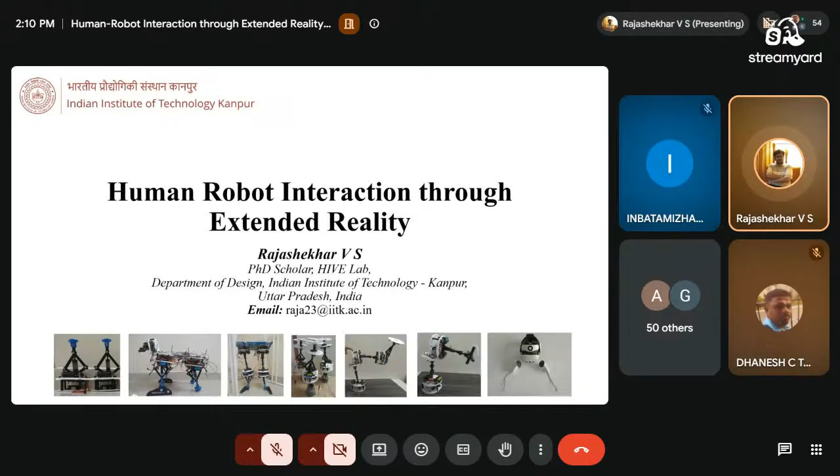This is V.S. Rajashekhar, a PhD scholar at the HIVE Lab of Department of Design, Indian Institute of Technology, Kanpur. Today, we are going to look into a topic called human-robot interaction through extended reality. I think many of you would have come across the term human-robot interaction, but extended reality may be a new terminology for you, which we will be dealing with in detail in today's session.

A short introduction about me. I did my schooling at Balalok Matriculation Higher Secondary School in Chennai, bachelor's from Adhiparasakthi Engineering College, affiliated to Anna University, master's from SASTRA University, Thanjavur, and I'm pursuing my doctoral degree at Indian Institute of Technology, that is IIT Kanpur. I have worked at Tata Consultancy Services, IIIT Hyderabad Robotic Research Center, TAL Manufacturing Solutions Limited, and Indian Institute of Science, Bangalore.

My area of interest is centered at snake robots, where I focus on bio-inspired gaits, computer-aided multi-body dynamic analysis, modular robotics, extended reality, locomotion control, mechanism design, robot kinematics, and human-robot interaction. My current focus during the PhD is in the area of disaster management, where I create awareness, evacuation, and rescue through extended reality by conducting user surveys.

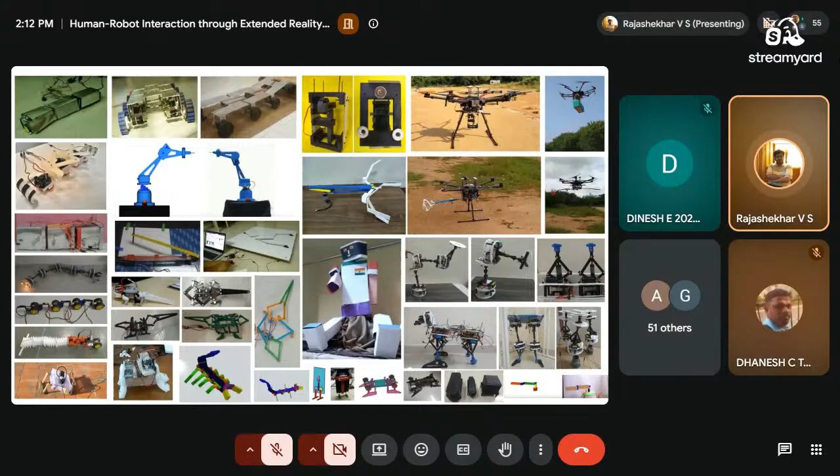These are a few of the robots that I have built in the past 15 years. This ranges from snake robots to aerial robots and manipulators. Now let's dive into today's session.

Today we'll be seeing the elements of human-robot interaction, which is shortly called HRI, through extended reality, which is shortly called XR, the elements of XR, that is elements of extended reality, their applications, a few topics in mathematics, and a case study about how to control a robot through extended reality.

Now we'll look into the elements of human-robot interaction through extended reality. We'll be dealing with individual elements, that is humans, robots, interaction, and extended reality. We will try to understand who a human is. Humans, in general, differ based on their gender, their special capabilities, and their age group. They range from infants to old age. In between them, there are teenagers and young adults.

For example, a smartphone is a technology which was successful because it was able to understand the needs of people of all age groups, and it is useful for all people. In a similar way, the technology which we design using human-robot interaction should be useful for people of all age groups. This should be in our mind when we design robots for humans. Robots.

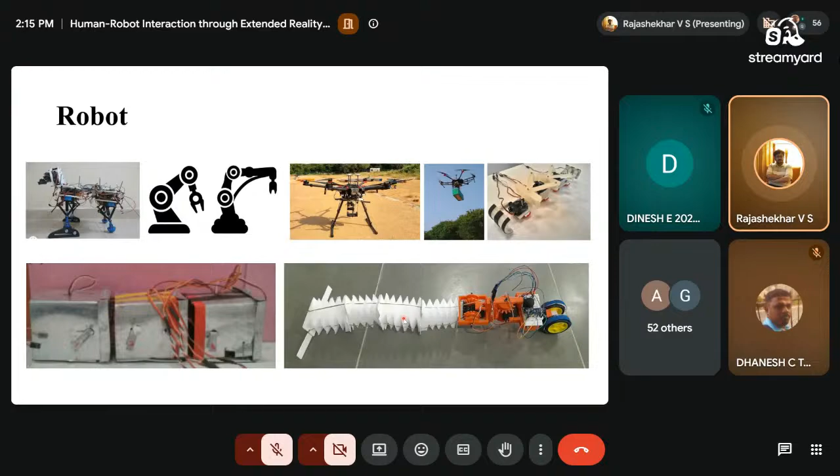So these robots can be controlled using extended reality. In interaction, the humans and the robots have to interact. This interaction can be physical, that is by directly humans touching the robot, or through gestures by asking it to stop or start using our fingers and hands, or it can be through voice and gaze controllers by which you can control the robot.

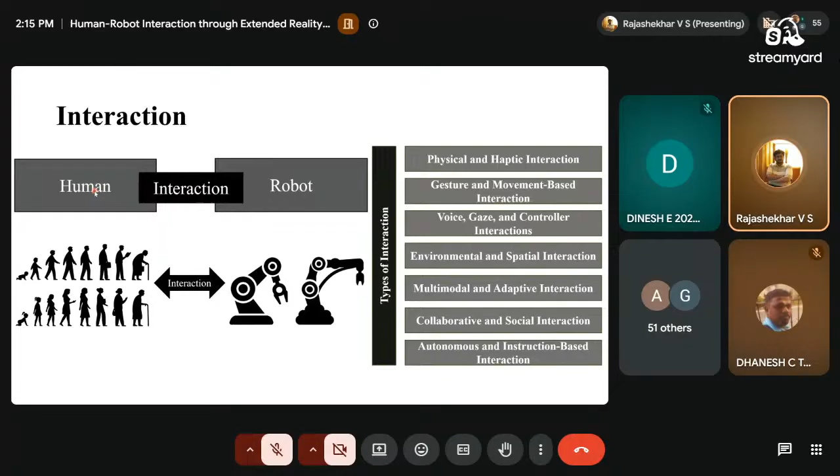It can be through environmental and spatial interaction. It can be through multimodal - multimodal here means it can be a combination of physical, gesture, and voice. And it can be through collaborative means by using several sensors, or it can be autonomous or instruction-based control. So this is how the interaction happens between humans and the robot in reality.

So in between them, there are a lot of realities called as phenomenal reality, augmented reality, diminished reality, mixed reality, annexing reality, augmented virtuality, and virtual reality. We will be dealing with them in detail in the upcoming slides. So if we are able to control the robot using one of these 7 types of realities, then it is called as extended reality - you're controlling the robot through extended reality.

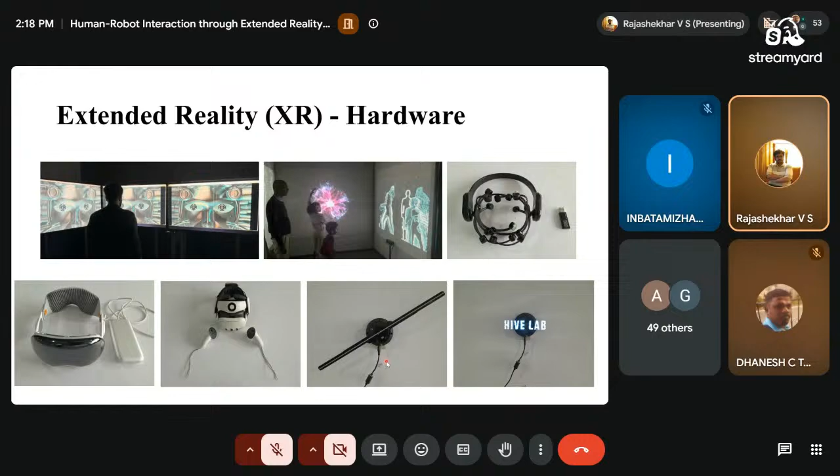Coming to the software, this is called Unity, which is mostly used for creating the 3D environment, and also Unreal Engine, which are used in most of the cases to create environments which can be virtual in nature.

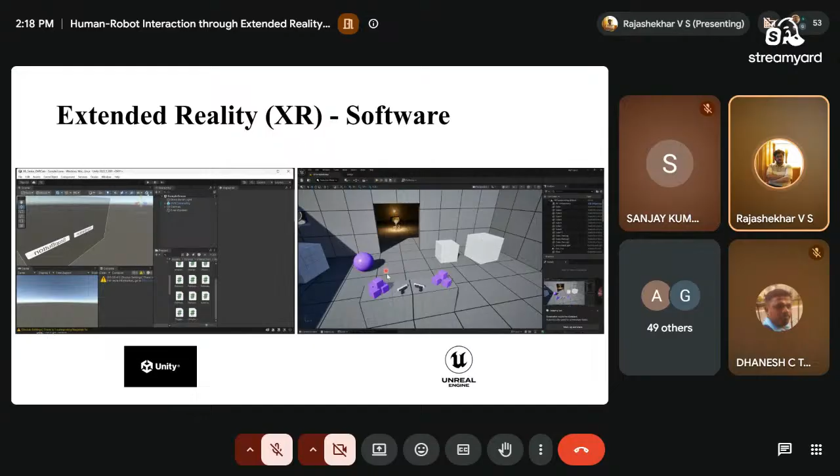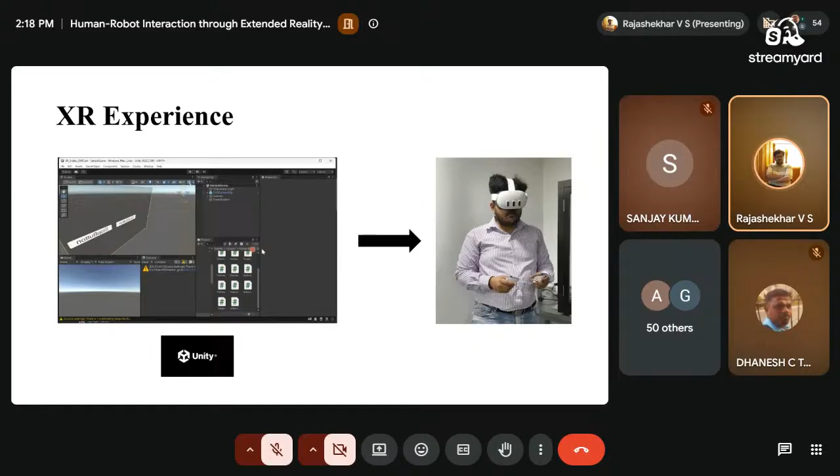So the XR experience, that is the extended reality experience, is given by focusing on a particular software, creating the environment, and projecting this environment by clicking the play button over here so that it is connected to the headset which I am wearing, and I can control the environment using the joystick.

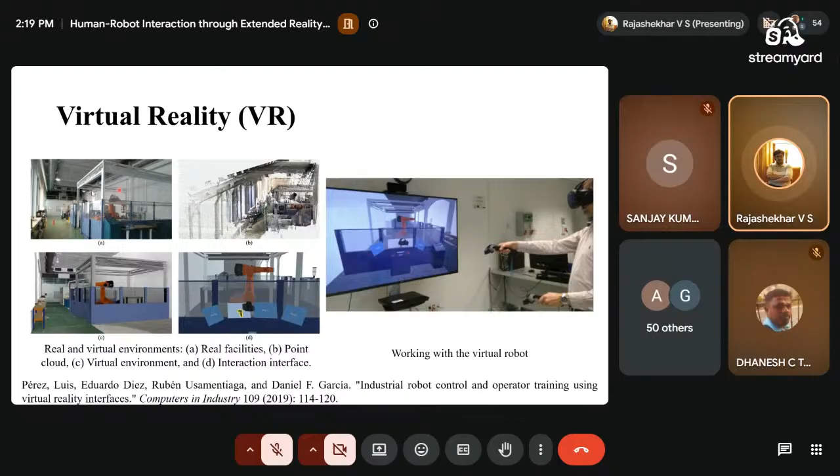This is the physical environment. Point cloud - a lot of points are taken and given colors to it so that a point cloud is created, and your virtual environment is created, and an interaction interface is created over here. So the person wears a VR headset, virtual reality headset, and uses the joystick or the handheld controllers to control the robot which is in the physical world. So this is through virtual reality.

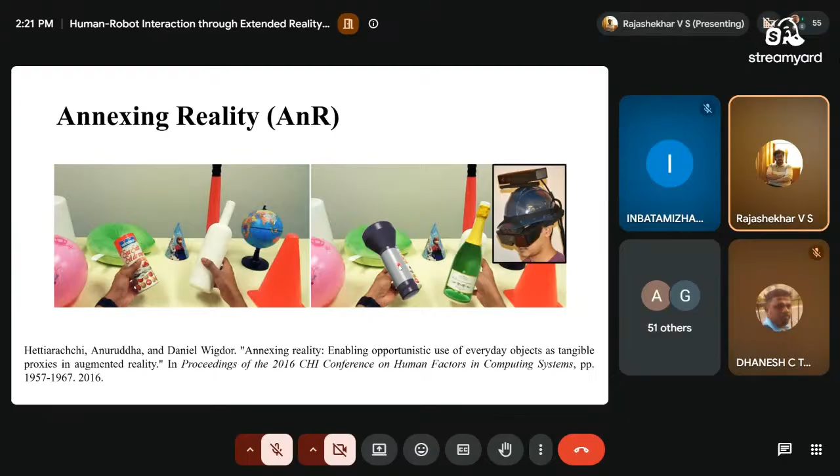Next comes annexing reality. In annexing reality, we have physical objects in a particular shape and a person wears a headset and looks at that object. If a person holds this cylinder, he views something like a torch in the virtual world, so he gets the feeling of holding a torch in the virtual world. Also, he holds a white bottle in his hand, but in the virtual world he perceives holding a different bottle. So this is called annexing it with some other virtual object in this scenario. This is called annexing reality.

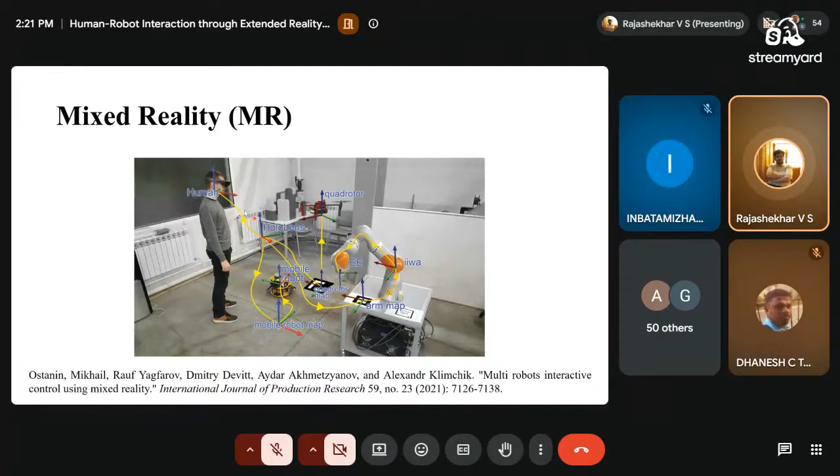Next comes mixed reality. In mixed reality, there are multiple robots which are controlled using a human interface. It is 50% real and 50% virtual, in the middle line. The human is wearing the headset and controlling the robots which are there in the physical world. This is the interaction of humans with robots through VR headsets.

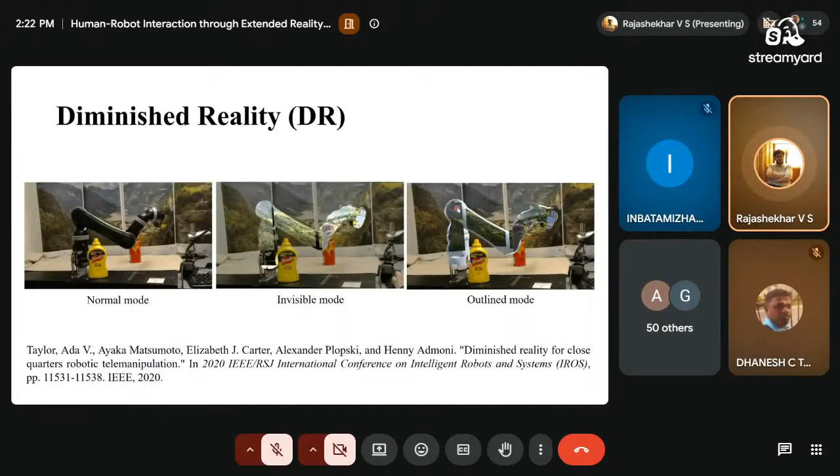Next is diminished reality. The term diminished reality means we are removing some unwanted object from the scene for better perception. In the normal mode, there is a robotic manipulator, but diminished reality removes that manipulator so you can see the environment. In some cases, you just need to show that there is a robot, so you can draw an outline and show it on the screen. This is diminished reality.

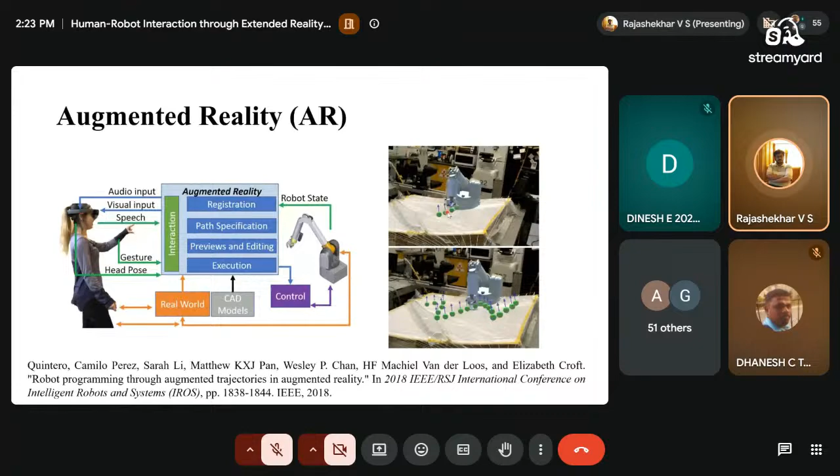Next comes augmented reality, which many of you would have come across. In this case, the robot has to follow a path. The green color sphere with an arrow on top shows the path which the robot has to follow. This helps in understanding what the robot is capable of doing, and helps the user realize the path which the robot has to take.

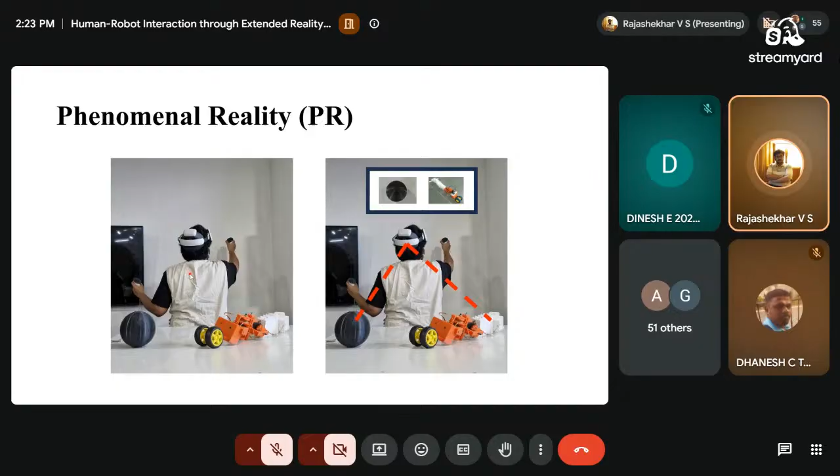Next comes phenomenal reality, which is close to the real environment. In the picture on the left, I am operating a spherical robo, black color, and an orange color hybrid snake robo using a VR headset, but we do not know what is happening. The picture on the right shows there's a signal from the headset to the spherical robot, and a signal from the headset to the snake robot, and in the physical world, the object present is viewed by the user in the virtual world. This is what is represented by the picture, the inner meaning of this picture on the left. The picture on the right outlines everything by adding extra information. This is called phenomenal reality.

Now coming to the applications of all these things, not specifically in the field of robots, but in the field of reality. We'll be seeing some applications related to agriculture, defense, design, healthcare, manufacturing, space, and disaster.

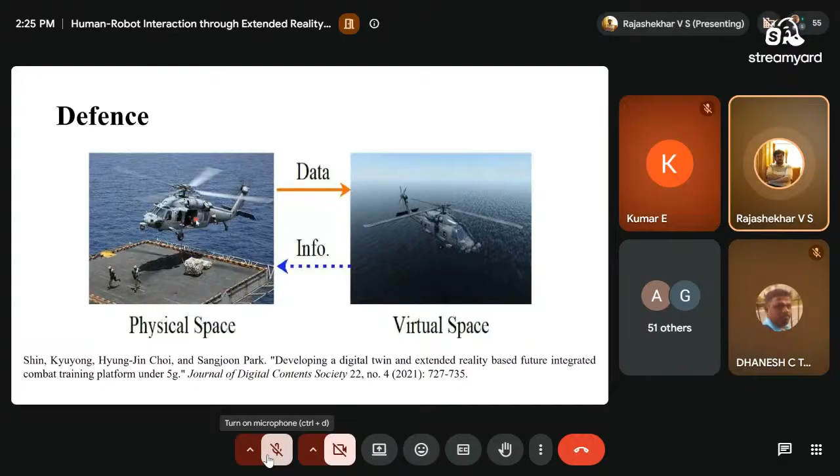In defense, there is a virtual space with a virtual helicopter, and in the physical space, there's a physical helicopter. Data is transferred from the physical world to the virtual space, and information from the virtual space is computed and transferred back to the physical space. This use is in short called a digital twin, a twin of the physical world in the digital space.

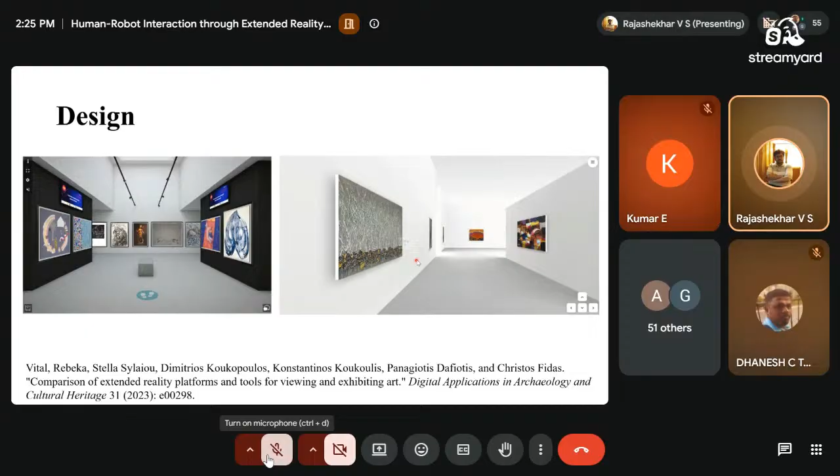In design, we can have art galleries which people can explore from any part of the world. You can have paintings on the wall which people can explore, write about in that area, look into suggestions given by other people, and conduct a virtual museum.

Next is manufacturing. Here what's happening is thermal spraying, which means heating the element to some temperature so that it becomes hardened. A person wears the headset, controls the robot's parameters, and the robot operates in the virtual environment.

It is getting controlled in the computer, and it transfers back to the physical robot in the real environment. This is very useful in manufacturing, not only in thermal spraying, but also in assembly lines where cars are manufactured.

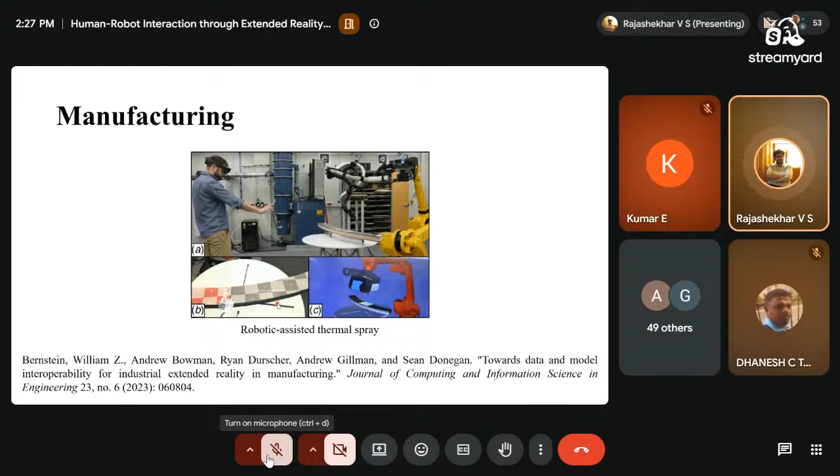This is how extended reality helps us in conducting experiments in disaster preparedness. When a disaster happens, for example an earthquake, a building collapses and people get trapped inside. We need to give people a prior experience of how they will feel when trapped inside a building, so that they do not feel afraid when trapped in a real environment. So the person wears the headset and in the virtual world, the building collapses.

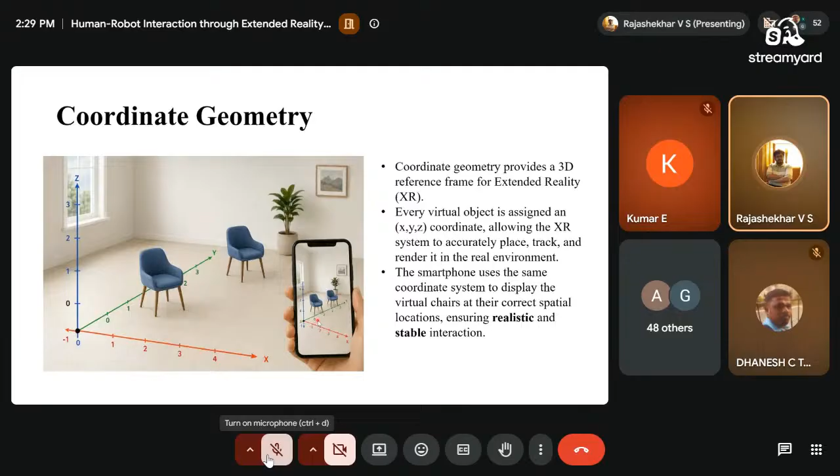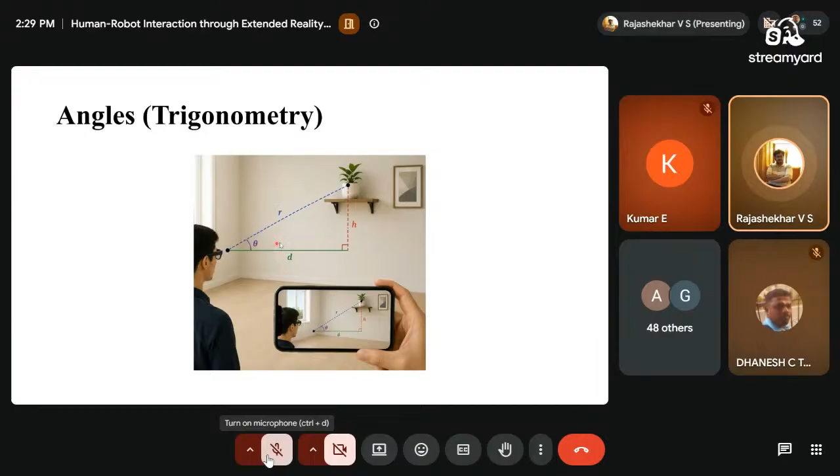Next is a simple thing: trigonometry. A person wears a glass and looks at a pot. What is the distance between the pot and the human's eye? That can be calculated using a simple relationship, using sine, cos, or tan, based on the knowns and the unknowns.

Vectors. What happens in vectors is that there are robots which actually move from one place to the other on a flat surface. This is the graph you would see on paper. The robot has to move 3 units over here and 2 units over here, taking a short path in this direction. This path is taken based on calculating the vector distance between these two points.

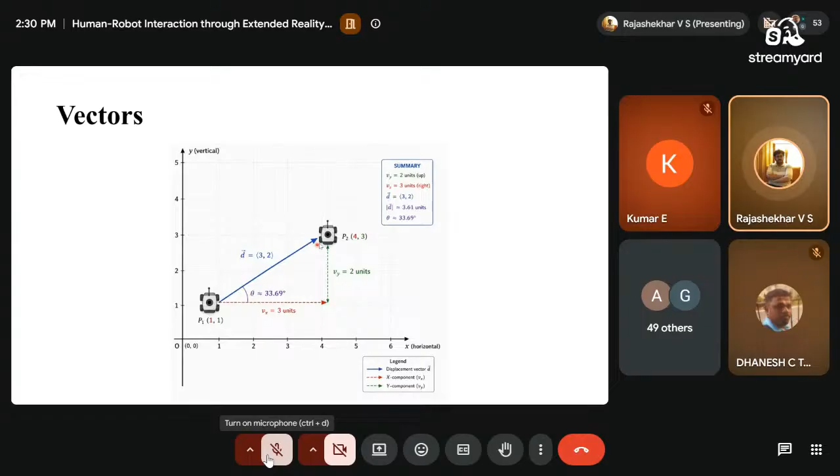Transformations. This matrix is the rotation matrix, rotation of x theta, that is rotation about the x axis. This is the z axis and this is the y axis, and the x axis is coming out of the screen from this point. This is the matrix commonly seen in textbooks to calculate the rotation matrix. It might appear complex, but it is very simple.

Here you see a graph which is converted into trigonometric equations, then converted into algebraic form, and then converted into matrices. This is the beauty of mathematics, which flows from graph to matrices.

There's a point P over here. This coordinate frame, this vertical frame, is rotated by an angle theta, as represented over here.

We need to calculate the entire distance between this point and this point so that we get the point's distance, that is L1 minus L2. L1 is from here to here and L2 is from here to here. The next is L3 plus L4, the vertical distance you need to calculate, which gives PZ, equal to L3 plus L4.

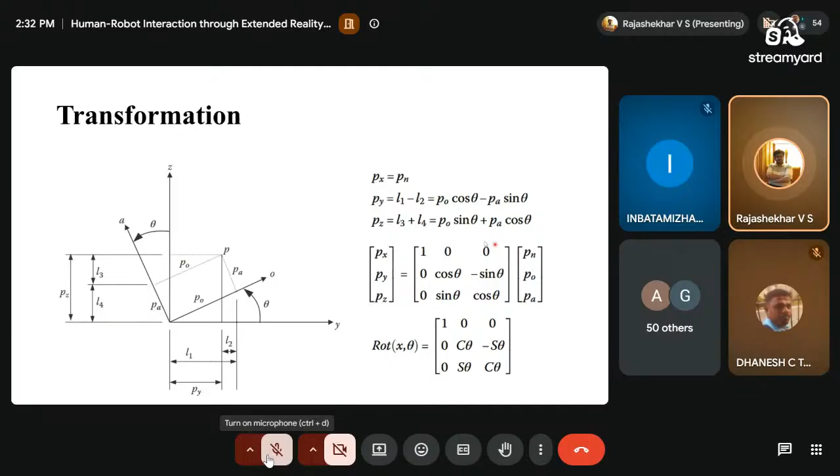Which just comes over here, minus sine theta, which comes over here. This sine theta comes over here, and this sine theta comes over here. And that Pn, Po, Pa comes over here. When you multiply this matrix, you will come back and you will get this equation. So in this equation, only this part is known as the rotation matrix.

Okay, the next topic is probability. For example, a robot has to start here and it has to reach a goal here. There are obstacles over here. The probability of hitting the obstacle when it moves from this place to that place is 0.2, 0.3, and 0.4. When there is a probability of hitting it, the robot will always try to avoid that area and try to reach the goal. So this is the probabilistic heat map.

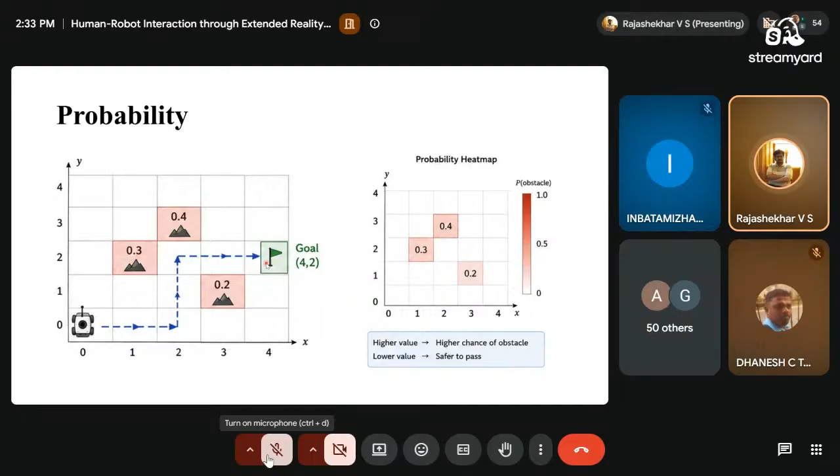This is 0.4, 0.3, and 0.2. So the robot here tries to navigate in space where the probability is 0 and it reaches the goal point. So this probability plays a very important role in determining the path the robot takes to reach a goal.

So these are all some basic things, but there are many advanced things which we have to perform for a successful path that a drone has to take while flying. Now let's move into a case study. So what happens here is, just a second.

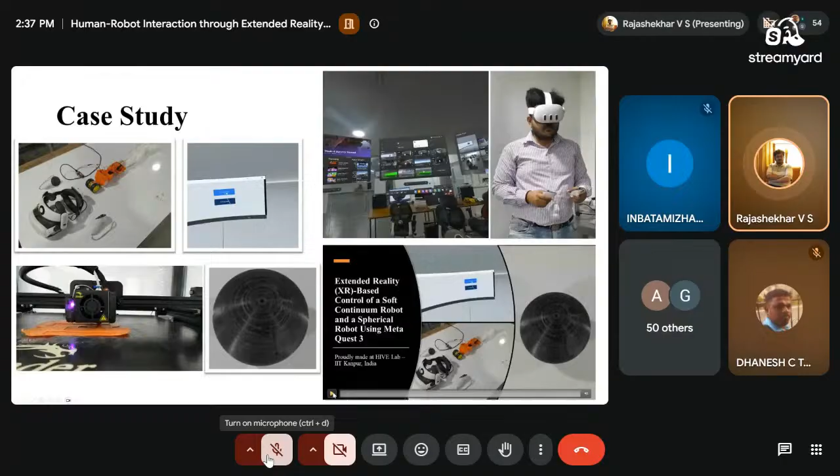So once I operate the robot, I just come out of the environment. You can see the person moving in the space. So this is how you experience XR. So now I will show you a video where you can see how the robot is being controlled. Both the spherical and the snake robot are being controlled. I'm pressing the button on the screen where I'm wearing the headset.

You can see the robot lifting up its tail. Now I'm turning the other side where I'm controlling the spherical robot.

So, coming to the conclusion, in today's session, we saw the elements of human robot interaction through XR, the elements of XR, the applications, the topics in mathematics, and the case study.

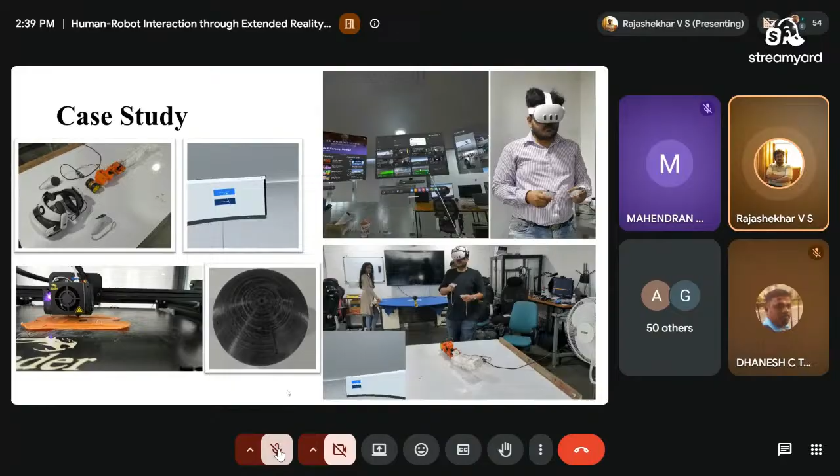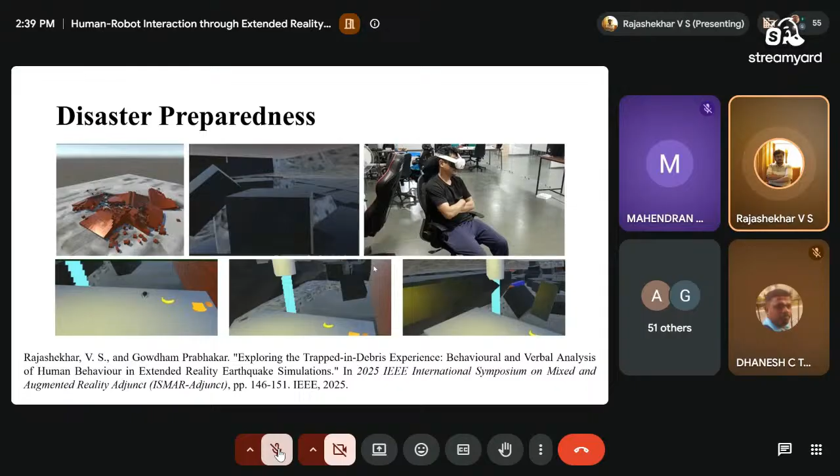And before that, I had worked on this project where I created an experience for people of how they will feel when they're trapped inside a building until the rescue people come to rescue them. So these are the two projects which I am showing today. But there are some other projects which you can find on my YouTube channel.